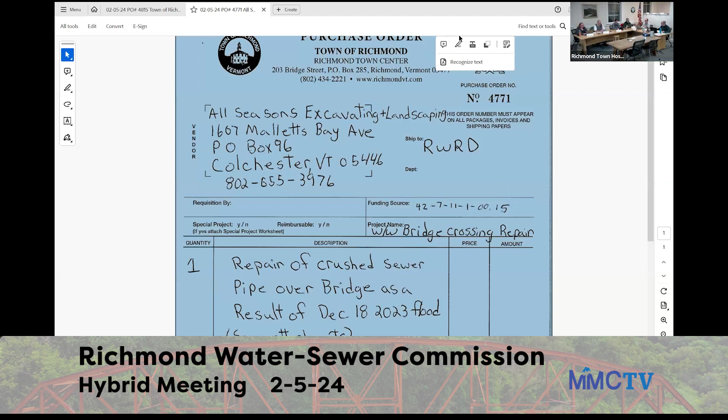Morgan, I move to approve purchase order 4815 to the Town of Richmond for the Transfer, water administrative support and sewer administrative support, total amount of $41,500. David, I'll second. Discussion? This is just moving monies from accounts to different accounts, basically to pay back for time, mostly me and Connie's time, and any other administrative support they get. When we do work for water and wastewater, it's payback for that. There's a backup document with assumptions on time.

Holding a vote on purchase order number 4815. All in favor, say aye. Aye, Aaron aye, Bard aye, Jay aye, Morgan aye. Motion carries.

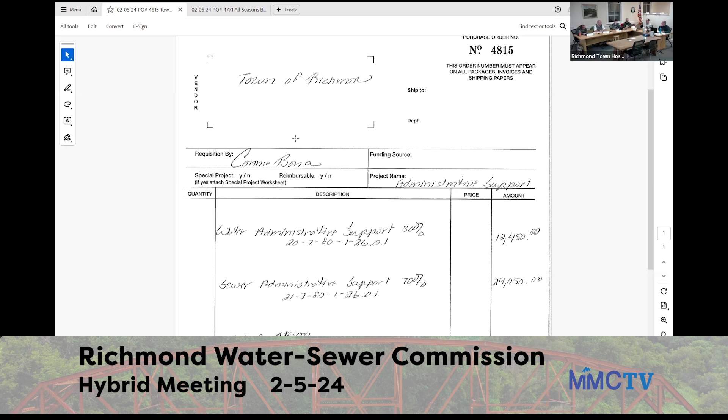Morgan, I move to approve the warrants. David, I'll second. Discussion on the warrants, is it electronic warrants? Two other warrants, I think. Yeah, we have FEMA warrants and water. Do we need to vote? Usually just do them in one swoop.

One note on the FEMA warrant, that's for the repair under the bridge. It's looking unlikely that it will be a FEMA event, but we wanted to continue to track it separately until we get an official no from the state, which I think is probably coming. At that point we'll have to come back to see how we want to pay for that, out of a reserve fund or overspend unassigned, but we'll make that decision later.

We can hold a raffle here in Richmond for the right to name the pipe. I love it, that worked out. Ending discussion on approving the warrants.

Holding a vote on approving the two warrants. All in favor, say aye. Aaron aye, Bard aye, Jay aye, David aye, Morgan aye. Motion approves, so carries. Warrants out of the way.

Next on the agenda, items of presentation. First up, wastewater evaluation. Probably easier if you come up to the table. Yes, please.

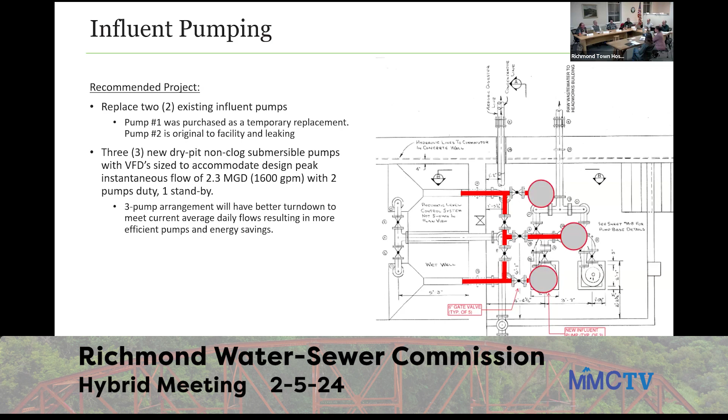Right now the pumps you have in are way oversized for the use they do. And this is the pump that the man from up north got for Phil, Laramie, right? Agreed, thank you. We're living on borrowed time right now, literally. It's like the name of a new book, The Man From Up North.

For the Headworks, we're recommending that a new Headworks building be built over the existing wet well. The significance of this is that right now, the reason those pumps are in bad shape and at risk of failing is that sometimes rocks or large objects come in, and there's not adequate screening ahead of it. Generally what we like to see in a headworks is screening removal before a pump that protects it from ragging, bricks, rocks, anything that comes down influent. That's been a huge problem.

My idea is to convert that wet well by pouring an intermediate slab and putting in a mechanical multi-rake screen — you have your bars, it rakes it up and brings it to the second level, so this is a very large screen. They're really cool if you've ever seen one in action. It brings material up to a higher level where it's put into a wash compactor, washed, compacted, and dried for a much more tidy disposal. So that is my idea.

And then the second part is there is an existing Headworks building that has a combination unit of screening and grit.

We wouldn't need the screening there, and we would convert that to just grit removal, which is important to protect the rest of the plant. So that's coming back, you're taking the bulk of the degradable stuff out first, and then the grit goes to the next one. So we would do that before the pumps, and then the pumps would bring it up to the existing headworks where it would go through grit removal.

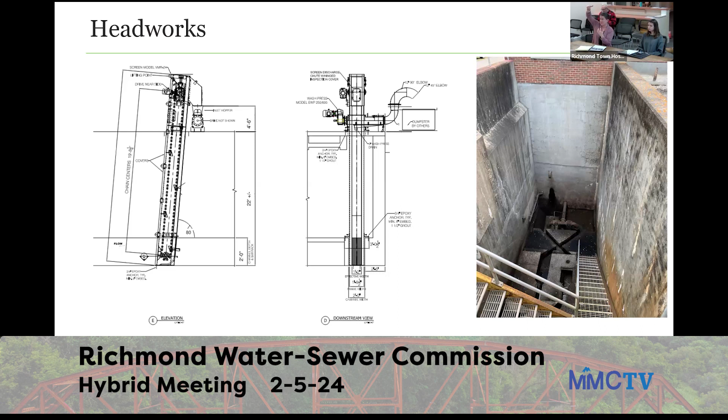Is this similar to like a gutter chain in a barn? Kind of like, does it go around and have paddles? Yeah, there's a number of rakes, multi-rake, several of them, and they continuously pull the screens, rotating. Brings them up, and then it comes over the top and back around. Exactly.

Biological treatment: in the anoxic selectors, we're looking at replacing the mixing system. We've proposed for the recommended project a compressed gas mixing system. They're highly efficient, using a lot less horsepower and energy to mix. I won't get into the technology, but this is one mode of mixing. Right now there are submersible mixers, which tend to fail after about 5-6 years and have to be replaced. That's for the anoxic selectors ahead of the aeration tanks.

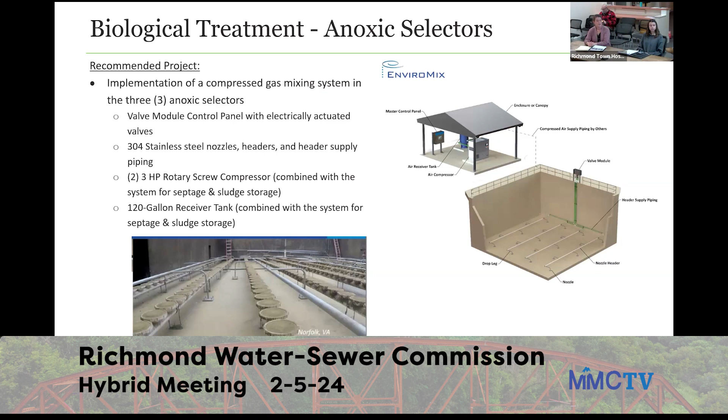And then in the aeration tanks, we're looking at replacing the diffused aeration grid inside each basin. New blowers - the technology and efficiency on blowers just continues to get better year after year, so those blowers would be more efficient. I should note, and it's in the report, that the existing blowers do not deliver enough air for your biological treatment right now.

It's not that they are undersized from the original design criteria, and I think we talked about this before - you have pretty high organic loadings coming into the plant.

So, and what is the condition of like those concrete wells at the moment? Will the concrete have to be repoured, or are those in decent shape?

Your comment that we have higher BOD - could you pause there and explain why you think that's so? Well, you're accepting a lot of septage, and so that septage goes into your solid stream and gets dewatered. There's what we call it a pressate - the liquid that comes off of the dewatering equipment goes back to the headworks. That is high in organic loadings like BOD and TSS and nitrogen and phosphorus.

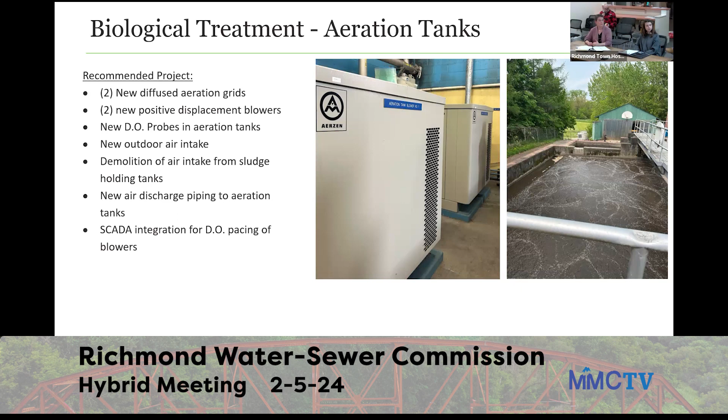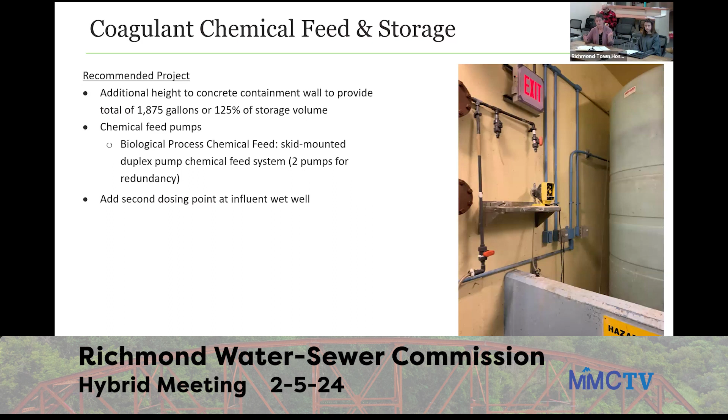All right, thank you. So this is just replacing age-related equipment. The chemical feed and storage area doesn't meet state requirements for containment volume, so we'd add a little bit to the wall there and replace the feed pumps. You can see there's one there that doesn't meet the redundancy requirements. These are small little things to upgrade.

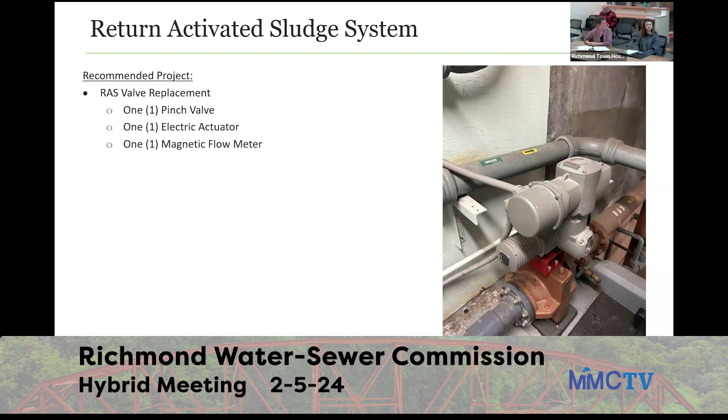Again, here it's age-related replacements, replacing that valve and the actuator and the magnetic flow meter. This is part of the biological process to return sludge to the biological process to help feed the bugs. And then the waste activated sludge, you have to remove sludge from the process to keep the biology correct, and replacing the one pump.

This pump has never been replaced. I hear he loves it. The Penn Valley, he loves it. It's never been replaced, but it's so old that he can't find parts for it anymore. Like that '67 Chevy.

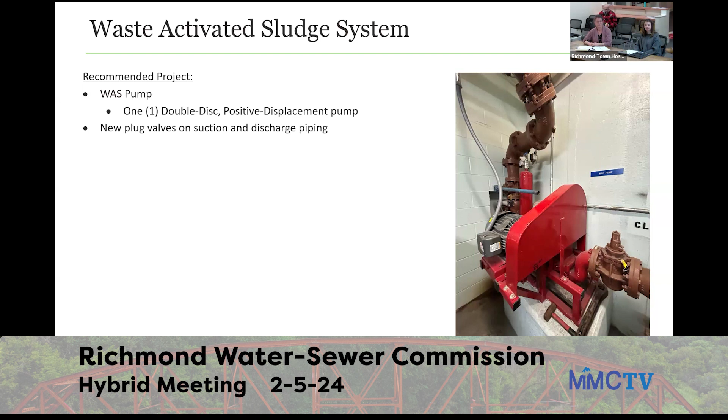Filtration, we need to do a structural assessment of these steel tanks. You can kind of see a little bit of this rust corrosion on the steel tank. That might not be bad, it might just need to be taken down, sandblasted and recoated. And then the cloth media filters, the cloth should be replaced.

There's some, not all of, I know Steve has already replaced some of these things, the valves and some of the drive motors. So some of these things may not need to happen because he's been replacing them as he goes. But new instrumentation and SCADA, I know these are all completely manual, and he expressed it would be nice when he has a wet weather event to be able to go to SCADA and say turn on the second filter, instead of having to do it in manual mode.

Why would that tank not be some sort of stainless steel or plastic material? Why is it steel? It's all about the money. I don't even know if they make these in stainless steel.

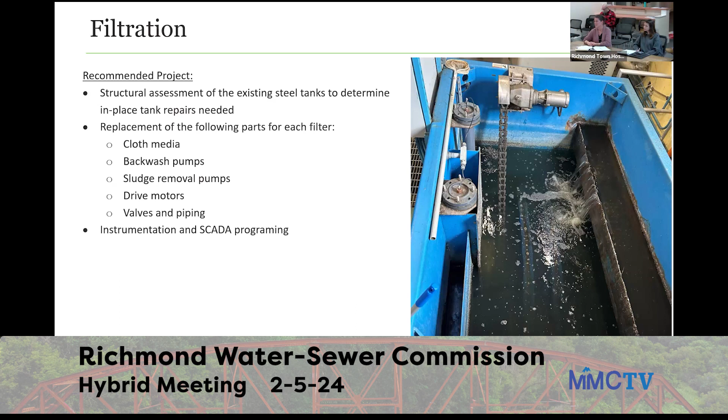They make them concrete, but at this point, you would have to take the roof off to get a new tank in here. So I think the recommendation is to just do any repairs that need to happen to these tanks. And hasn't coating technology improved over the last 20 or 30 years? I would believe so. So I don't think there's a structural issue with these, but we would assess it during final design.

The UV disinfection system is just to be replaced with new bulbs. They've made headway in the technology of these bulbs, and they're more efficient. We're replacing the monitoring system and the intensity parameters on the alarm.

Why is there styrofoam blue board over that? I have no idea. To hold the coffee cups, probably.

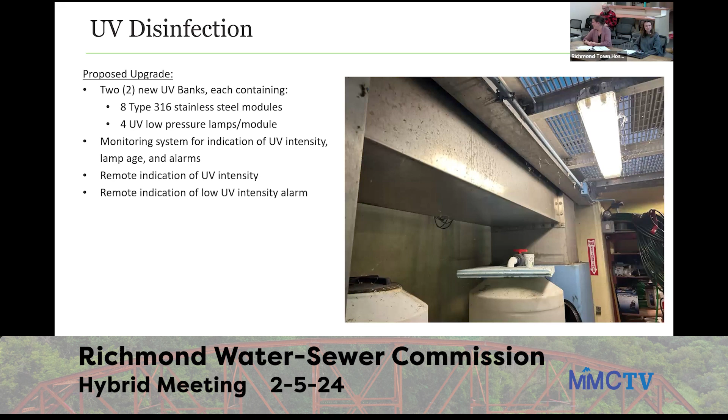Effluent flow measurement - we're saving it. Some part of our analysis found that the effluent flow meter taps out at a certain MGD, around 1.15 - it's supposed to measure up to 1.15 and it doesn't. So we had issues trying to figure out what peak flows were coming through. The recommendation is to replace that V-notch weir with another one set slightly lower, changing the geometry a bit so we can get a higher flow measured out of it, and then just replace the level sensor above it.

I'm going to pause here. If you see the effluent, there's a sump here. This is where it exits the plant, going kind of towards the top of the screen. What you see there is a sump pump - this is something Kendall rigged up after Irene. During Irene, the river rose so high that it came back up the outfall into the sump, over the weir. That UV channel elevation is below the 100-year flood elevation. It just poured over the top and filled the whole basement.

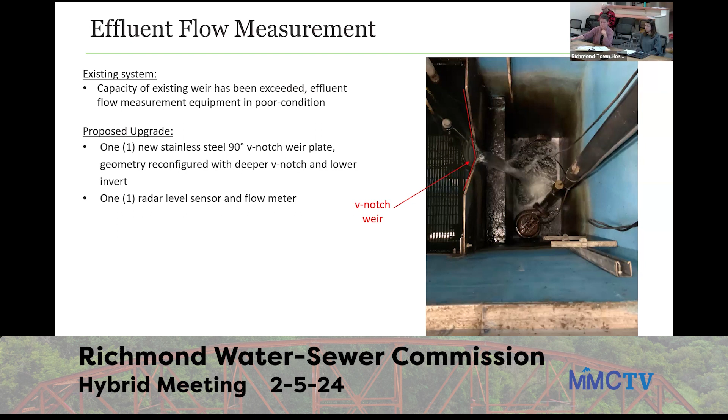I just wanted to go ahead - so there's that picture of where Irene came up to.

That sump pump Kendall put in has saved the plant a few times, especially during the July 2023 flood and the one that just happened. The July one was a flood, the December one was more of a wet weather event. He was able to keep up with getting flow out of the plant even though the river was right there. What he did was put a check valve on the outfall, like a backflow preventer, so flow couldn't come back - but he still needs to get it out. So that sump pump was just shooting it out the wall.

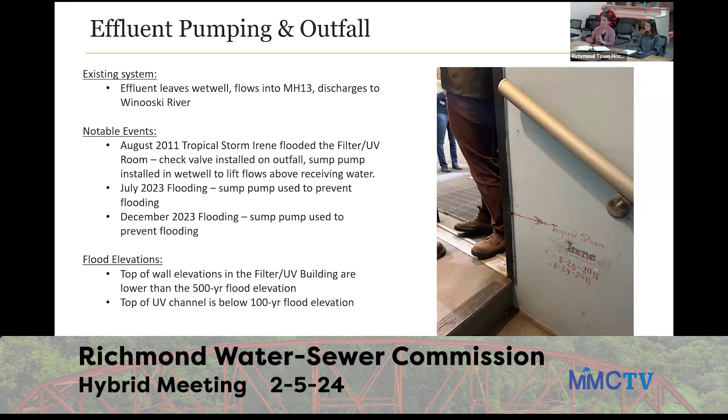So my recommendation is to build a real effluent pump station. The state will require redundancy, and it's too critical of a piece of infrastructure to not do it properly. You can go to the next page.

It's a wet well just off to the side. We would connect back into the existing manholes and then put a backflow preventer off of manhole 13. These pumps would not normally be on - they'd just be sitting there for these events. They could be exercised so they're always ready to go. We'd size it for that 2.3 MGD that was just recorded - that was actually recorded through the plant in December. He was putting that flow through, and it would pump up and discharge out the back of the plant, since at that point the river's right there.

So this is an extra structure added onto the outside. Yep, okay.

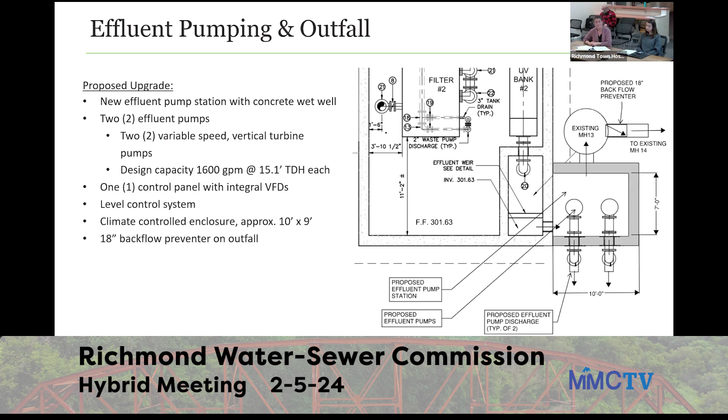We were talking about the proposal to actually accept up to 250,000 gallons a week. For me, this gets into the price structure and want-to-have versus need-to-have. My view is the septage doesn't need to have. So if we're doing it because of revenue, what is it driving in terms of cost?

We'll get to the cost later, but I did a quick calculation - at 13 million gallons, as if it was coming in routine, every day, 5 days a week, you'd be at almost 8 cents a gallon at 13 million gallons. That's $975,000 a year in revenue.

Yeah, so what's my cost? Your cost last year, in fiscal year 22, you spent, I'll round up, about $250,000 in biosolids disposal and chemicals to press those biosolids. That's not my cost, see.

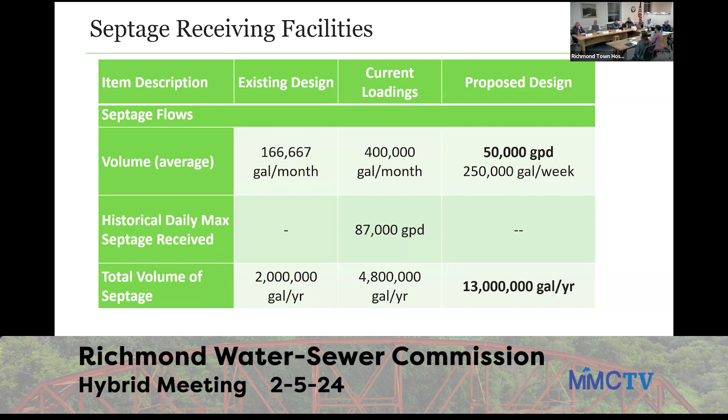Okay, so where septage is right now, that whole garage is open. It doesn't meet code, it doesn't meet the class 1 div 1 electrical codes. So the proposal is to enclose that area, seal it off so it becomes its own space, and replace the septage unit. It'll be the same size as it is now. So that's the recommendation to upgrade septage.

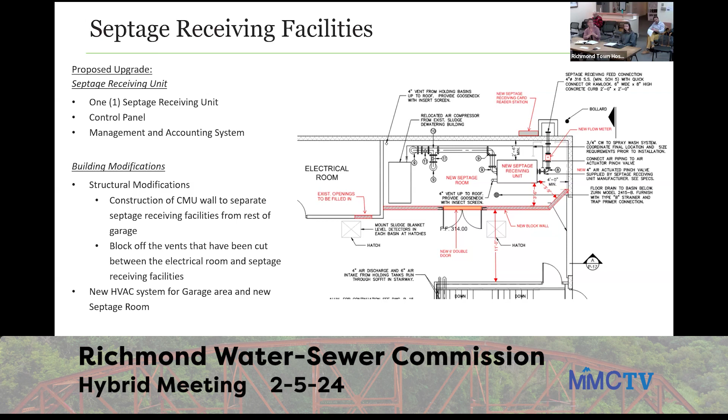Let's go to the next slide. Again, this is just volume, so we can keep going.

So along with that are the upgrades that need to happen to the holding tanks, and this would have to happen regardless of whether you decided to take more septage or not. It's the mixing systems in here — currently they're aerated. Our recommendation was to pivot to a compressed gas mixing system, which is a lot less energy intensive. We're still talking with Steve about his comfort level with those. This is a final design decision — we can do it with aeration or compressed gas, but basically the mixing of all the holding tanks needs to be upgraded.

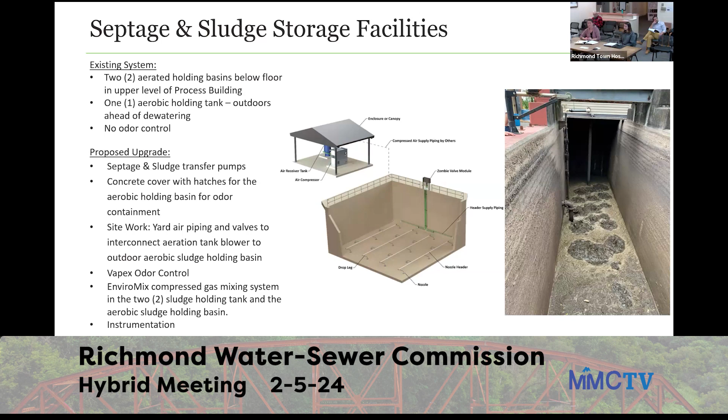So dewatering then becomes — let's put it this way — if you wanted to expand your septic acceptance, you would need to add to that, the channels to that unit. The two channels you just bought would still be used, and you can add on to them. So we would incorporate all the equipment you just purchased, the PLC, the flocculator, and we would just expand upon that if you want to.

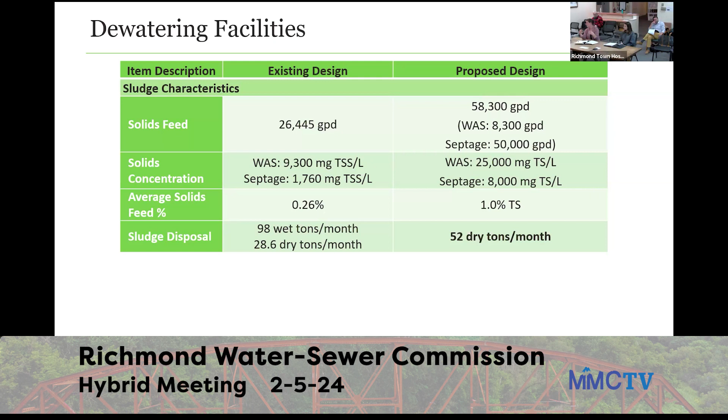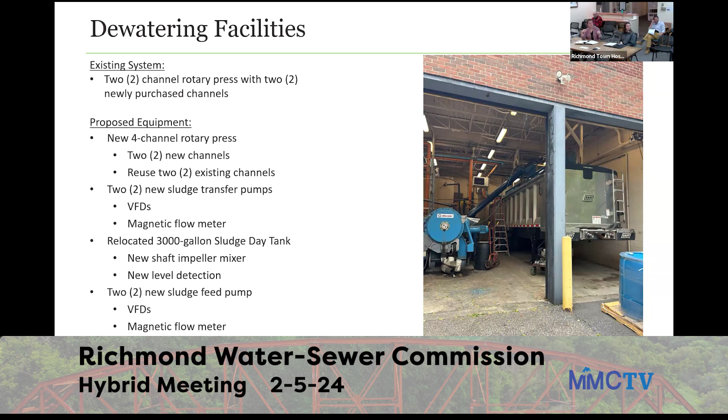If we go to the next one, there's my proposed building. It's an expansion of this building down — I can't see how far, but it's expanding it down. What I'm not showing here is the addition of a garage for storage where the old sludge drying bunker is, out there. It's demoing that and adding a garage bay, kind of a work garage for them. But this is giving more room.

It has a dedicated electrical room that would be separated from the main area, so it's not exposed to any of the odors. It's providing chemical — there's the polymer needed for dewatering, but it's also providing a coagulant tote so we can dose the pressate before it comes back into the liquid stream. And it's relocating that sludge storage tank, or the sludge day tank.

It's got new sludge feed pumps. Right now there's one pump that feeds — if that pump goes down, you're not pressing that week. So it's giving some redundancy in those systems.

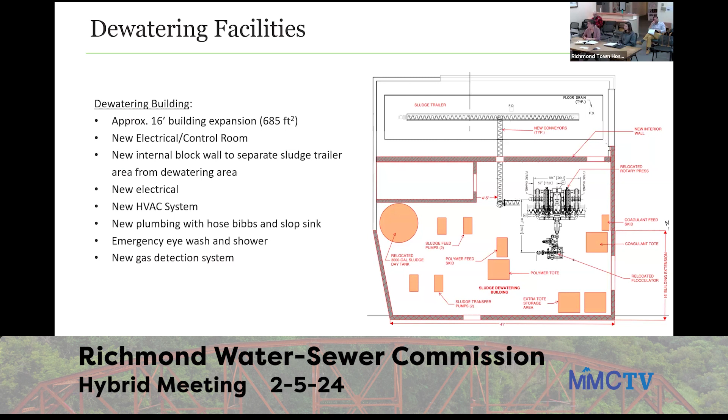Well, it gets tricky — we actually talked about this, but you still have to drive onto the site, like you still have to have the sludge trailer be able to drive onto the site. Could you build more of a berm? I'm not sure — I think the city of Venice has gates. Yeah, I was thinking about that trip to Venice. We have it in the budget.

How much higher is a 500-year flood than a 100-year flood? Out of curiosity — do we have that somewhere? I know we do. You remember it? We've only had 500-year floods in the last 10 years. I thought we were getting 100-year floods. Oh, we get those about twice a year now. I'm just worried about what a 500-year flood... once every 5 years. It's a moving target, isn't it? Take everything divided by 100. 500 years feels like maybe it could reach our house. And here's the thing, like when we designed — okay, right.

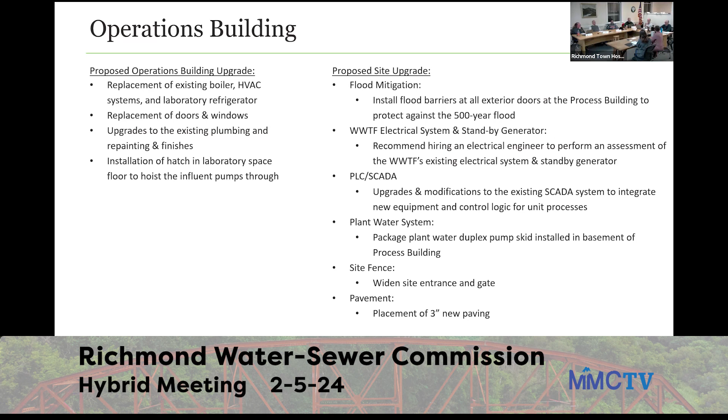Well, that would mean having an HVAC system that incorporates maybe 50% outdoor air. You'd have to, so the code is dependent on what it's rated for, but I think if it's class 1, div 1, you have to have 6 air changes per hour.

And the areas that are rated for that are the headworks. The septic area is rated for that. So it's anything that's prior to the aeration tank, because the aeration tanks kind of strip those volatiles off.

So you don't need that in the dewatering building, not at that level anyway. It probably goes to more like 12 air changes per hour. Wait, I said 6 per hour - sorry, I said that backwards completely. Oh, it goes from 12 to 6?

Yeah, okay, so every 5 minutes, every 10 minutes - still a decent amount of rate exchange. Interesting though, so you can declassify areas by providing more air exchanges. I said that completely backwards.

So the collection system, the report also looked at your collection system. Alex Arsenault from our company went out and did an assessment, popped manholes, and took a look. 15 manholes were identified for cleaning, and 6 were identified for some minor replacement. Maintenance was replacing bricks, and I think that is all work that the town can do.

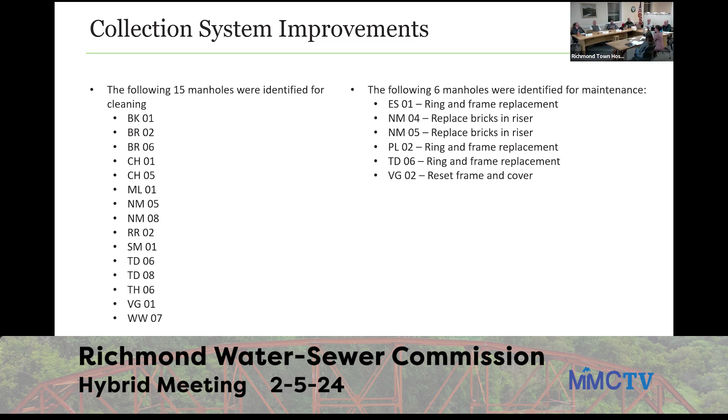What does cleaning entail, a high pressure type of thing? Yeah, hiring a vac truck - not a toothbrush. It's usually like a Vactor truck that's pulling them out and jetting them. And there are significant contracts that do that.

And then the Bridge Street pump station - you guys were talking about the force main repair that just happened. The pump station's impacted every time the river comes up. It's also extremely old, I think it's like Korean War era. And it is amazing that it has lasted this long, but that station needs to be completely replaced.

So full replacement with a submersible type, or one of the things that we're going to recommend is that you actually do a little bit more analysis to provide some alternatives. There's other technologies like a suction lift kind of station where everything's up high and it just pulls up. So that would be our recommendation, that we dive into what kind of alternatives would make sense for that station being where it is and being how it's always impacted by floodwaters.

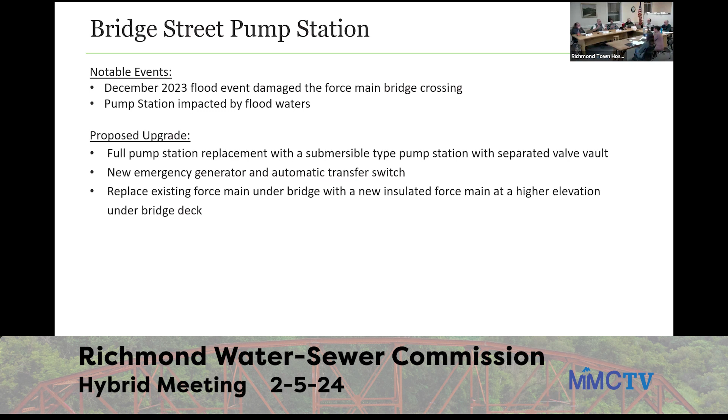Would it be in a different spot? That could be looked at. We're back to the same thing - so you either move it, you elevate it, or you try to protect it, right?

So this is just a summary of the cost, which you'll see in the report. I broke the areas into 4 different categories: collection system upgrades, which I think the town could do most of that work on their own, the wastewater treatment facility upgrade, and the flood mitigation upgrade, which includes the Bridge Street pump station, the effluent pump station, and flood doors and flood barriers.

And then septage receiving is, like I said before, everything associated with accepting septic, which would be the septic acceptance receiving unit, modifications to the building, the storage tanks and anything associated with them, anything associated with moving septic, and the dewatering upgrade.

Right now, at this preliminary time, we carry a hefty contingency of 30%, just because you don't know what you missed and what could change between conceptual design and construction. And then you'll see some different engineering costs listed below.

So the final number, you'll see 15.5 in today's dollars. I escalated that to a construction bid opening date of April 2027. The way we do this is using the Engineering News Record construction cost index, which has been publishing these indices for years. We track them and take a best fit line. Before the pandemic they were on one trajectory, then the pandemic happened and they went like this, and now they're starting to flatten out a little bit. We put a best fit linear progression to that and project out to April 2027. That's how that escalation is done.

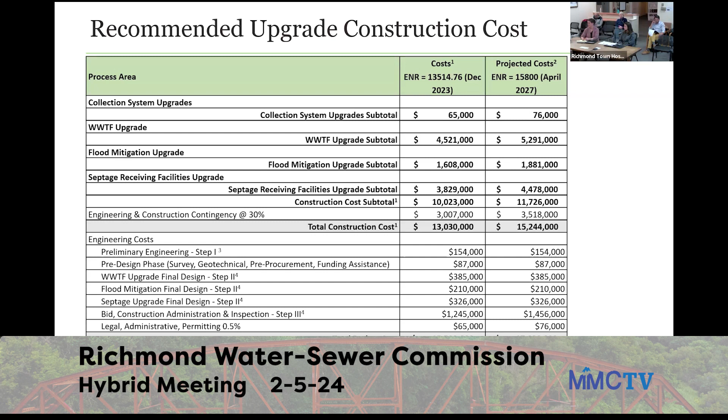I had one more slide, and it was just next steps. Okay, yes.

I think the immediate thing is I'm going to design those influent pumps and give you a recommendation on buying one of them to get you through to the upgrade.

We recommend that an amendment to this study be advanced upon to look into alternatives for your Bridge Street pump station. What's the best option for that pump station? The state needs to review the 90% report, and then we'll finalize it upon their concurrence, or address any comments, and finish that out.

This is why I had John come to talk about public outreach and funding assistance and the step 2 design phase, but I think we're running out of time. We might be able to come back at a future meeting for that. We had a good meeting just before this about those two items. I think we'll have a better proposal here in another couple of weeks. That sounds good to me.

One thing to keep in mind as far as the target date for public outreach, right now November 5th would be a good one to shoot for. It's a presidential election, so we get big voter turnout. If you were to start now, I want to build towards getting public support around the project, public understanding around the project. Some of that is the rate study and components that are going to allow voters to fully understand what they're voting on.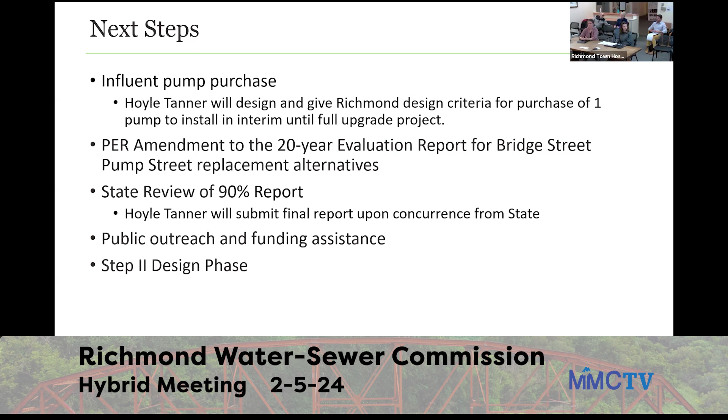Right, okay, great, thank you so much. Thank you for the time. Sorry, I hijacked that. No, it's great, it's critical. Thank you. It's too easy. Okay.

Mr. Chair, if I could, maybe we should just go right to the item and get it taken care of, because that's immediate. We have to do that. Okay, so it's item F, and then we might have a minute.

Steve's not here to review water data. Can Josh do that, or maybe? I'll share the screen quick if you want and give you a quick update. Water data, and then the next meeting, all good.

Table to the next item, F: consideration of rescheduling the second Water and Sewer Commission meeting in February due to President's holiday falling on the third Monday of the month, and we would move it to the following day.

Yeah, we've been doing that a lot, but we apparently didn't get that. Oh geez, I screwed up the date. I put Monday the 19th. You want us to move it from the 19th to the 20th? Oh no, I did it right, sorry, the draft motion's right. I read it wrong.

So we want to move it to the 20th, correct? So I so move. Okay, I have a motion, Aaron seconds, no discussion. All in favor, say aye. Jay, aye. David, aye. Bart, aye. Morgan, aye, though I may not come to that meeting, we have a birthday that day. That's okay, you can still vote in favor. Okay, the ayes carry it.